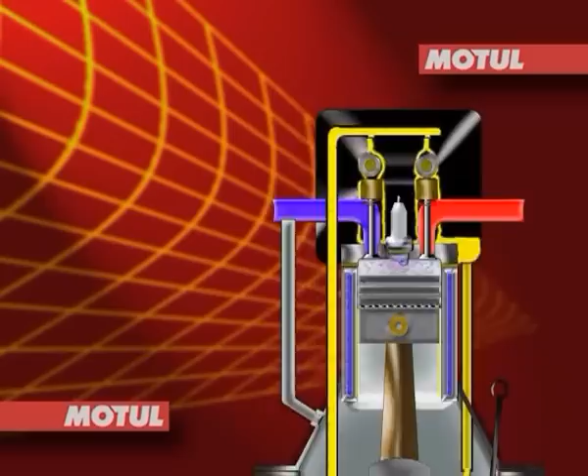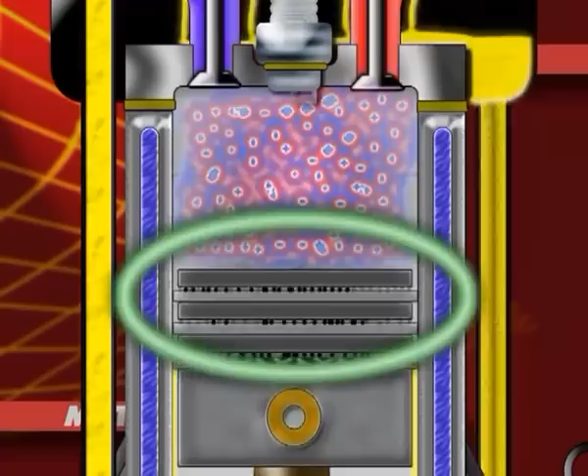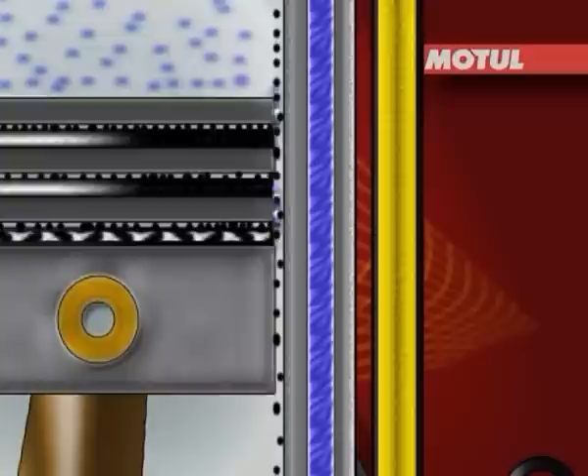Every time an engine is run, deposits are left behind, and these always have a long-term effect on the way the engine functions and its degree of efficiency. In particular, compression is reduced as a result of sediment in the area of the piston rings, oil rings, and their grooves. The deterioration in the combustion of the fuel-air mixture resulting from this leads to a reduction in the engine's performance. As a result of this, there is an increase in both oil and fuel consumption. This creates a situation where the sediment caused by the combustion process increases markedly, exhaust fume levels rise, and not least, the wear and tear on engine parts escalates.

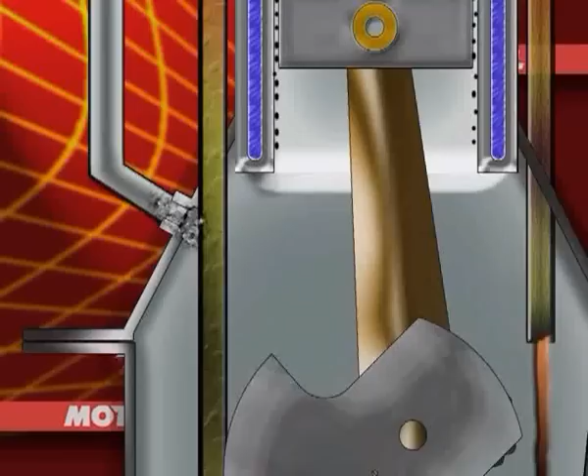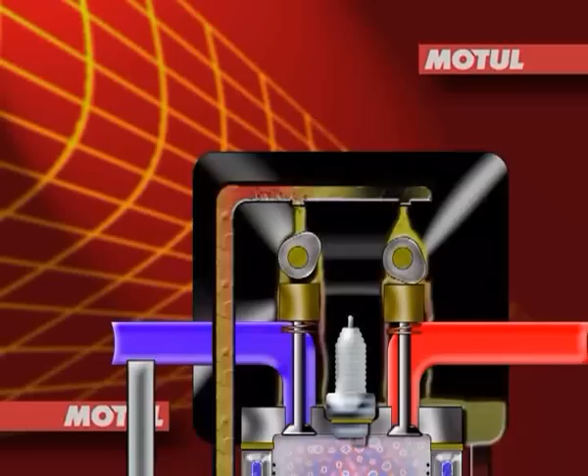Parts of the mixture and combustion gases evaporate in the crankcase and thereby accelerate the speed at which the quality of the oil deteriorates. This can lead to problems in the crankcase breather system. Larger particles of dirt, such as the formation of resin deposits in the oil ducts, can trigger a reduction in the lubrication of important components, for example, the camshaft.

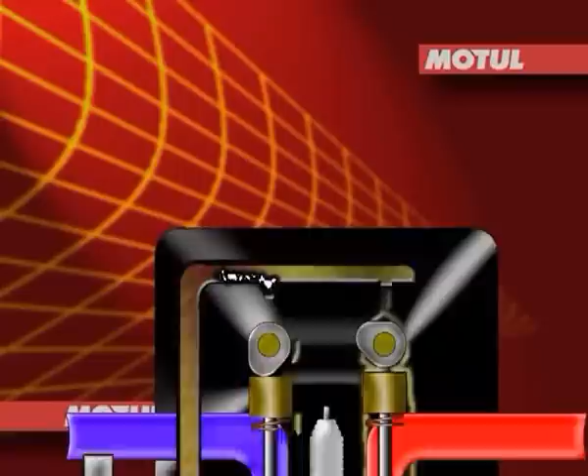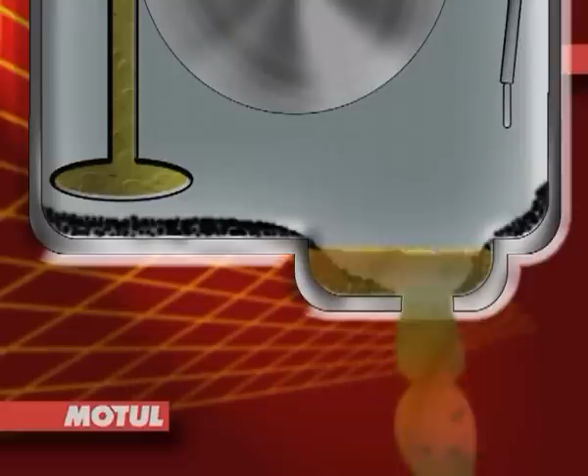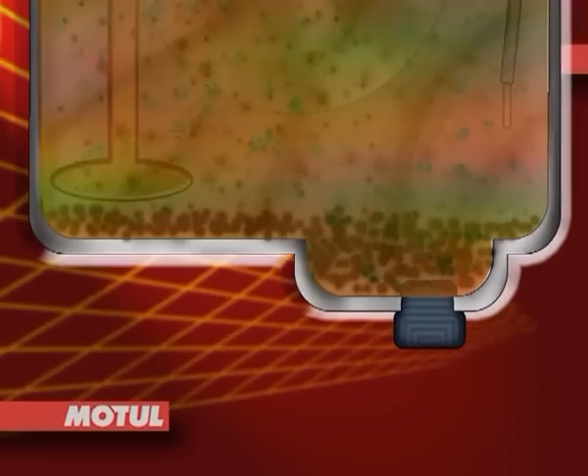Are all these impurities removed by a normal oil change? To illustrate this, let us have another look inside the crankcase. The old oil is drained during the simple oil change process. However, not all the impurities caused by running the engine are removed when the old oil is drained off. Some of them remain in the form of deposits in the oil and the lubrication system. Once the engine has been refilled with fresh, clean oil and is then started, the new oil absorbs the remaining deposits, and in a very short time, the oil is once again contaminated.

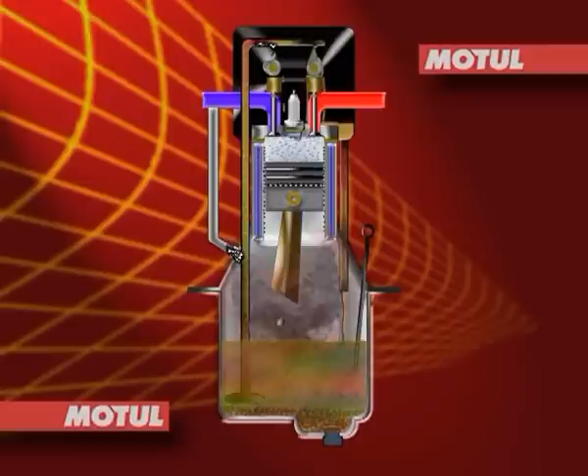This situation naturally has a negative effect on the efficiency of the new oil. In order to maintain both the performance and the economic efficiency of combustion engines, we recommend that the complete oil and lubrication system is cleaned before each oil change.

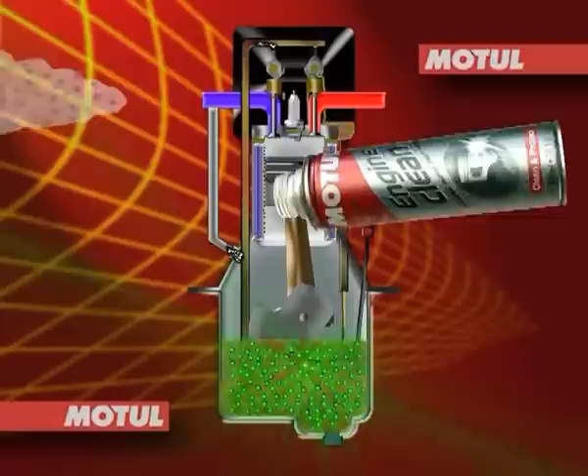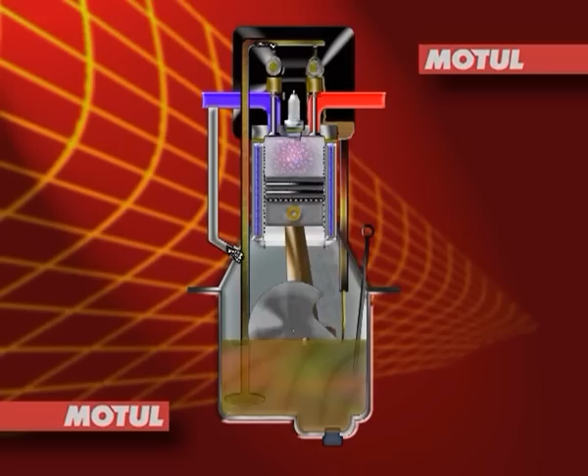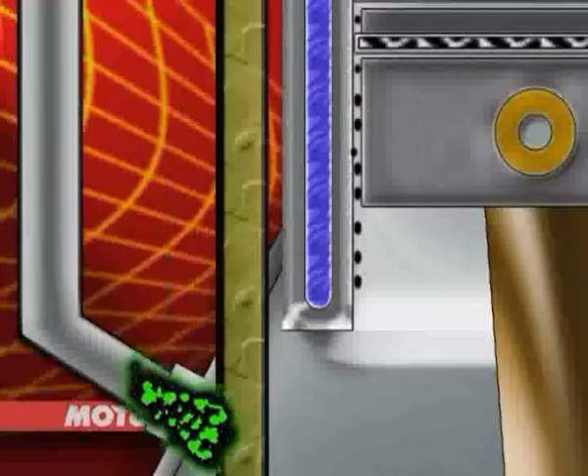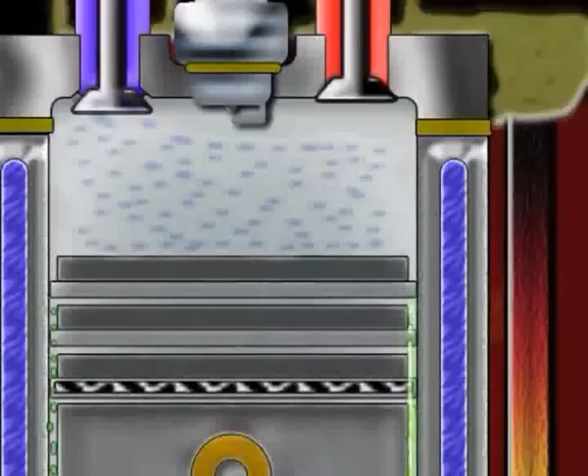After our cleaning agent has been added to the old oil, the engine is run in idling mode for 10 to 15 minutes. During this time, it releases all the impurities caused by running operations in very fine molecules, as shown here at individual problem zones. In our example, this is the piston ring area, the crankcase breather area, the camshaft lubrication area. At the same time, highly efficient lubricating substances protect the engine during the whole cleaning process.

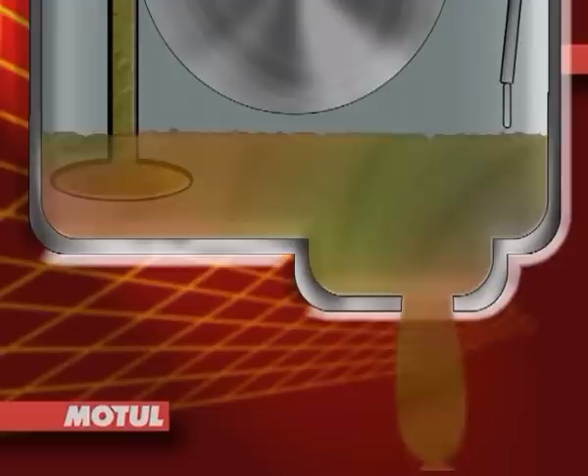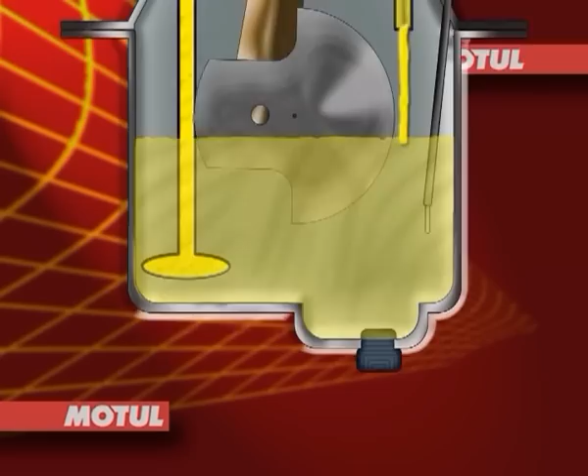Elastomers, such as oil seal rings and O-rings, are kept absolutely supple. All the impurities are now removed when the old oil is drained. This means that the oil and the lubrication system, which we fill with new fresh oil, are kept very clean. Now, the new oil can perform to the best of its ability in a clean environment and fulfill the tasks required of it, such as lubricating, sealing, cooling, purifying, and keeping particles in suspension.

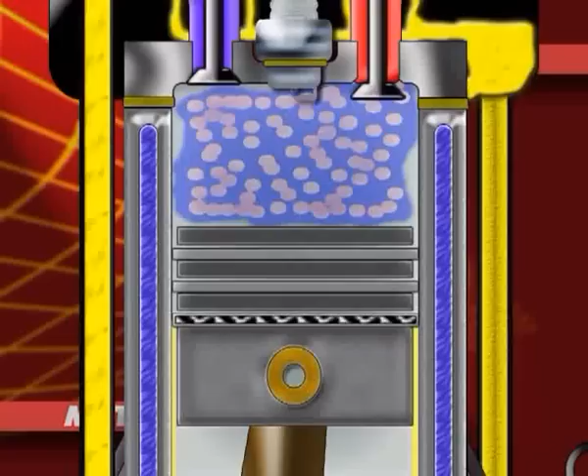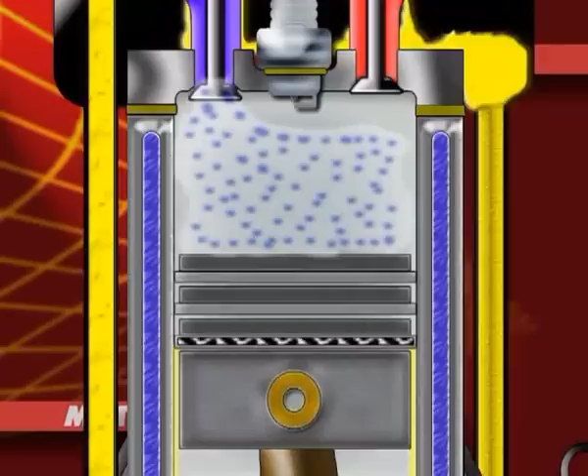The fresh oil is now able to absorb the impurities that have been newly created and is no longer limited in its ability to perform by the old deposits. As a result, we have new, fresh oil in a clean engine, the best possible oil and fuel consumption, improved engine performance, less wear and tear on parts, the lowest exhaust emissions, and a longer life for the catalytic converter.